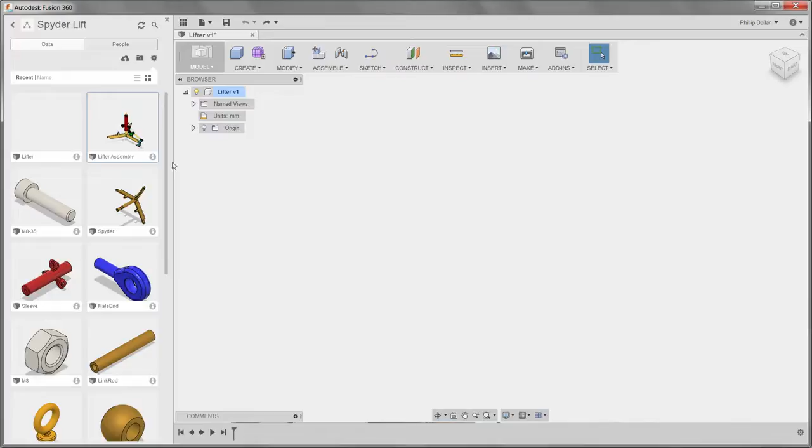In this how-to video, we're going to review as-built joints. I've started a new design, and I'm going to insert this assembly. The assembly came from Autodesk Inventor. Now, it was already assembled in Autodesk Inventor, so I want to take advantage of that. There's a couple of ways of doing that.

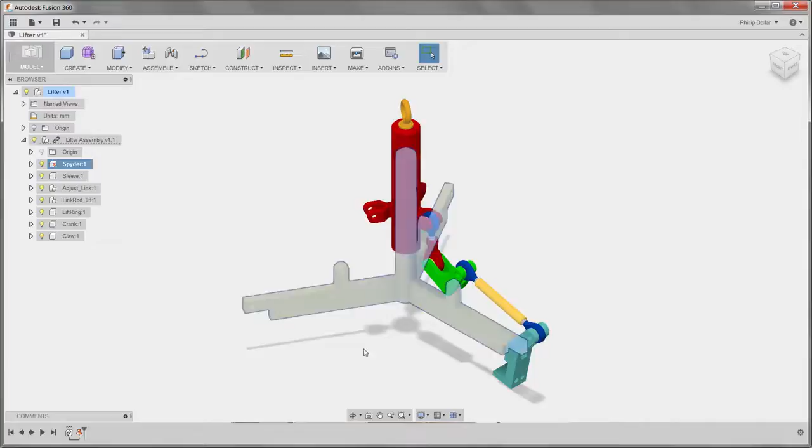The constraints applied in Autodesk Inventor don't exist anymore, you can see as I move that part. So what I want to do then is start by grounding the Spyder. So by grounding that, it can no longer move. All of the other parts, of course, can move, as you can see here. Now, as you move them, make sure that you revert back. That will pop up every now and then as you move parts or bodies in the assembly.

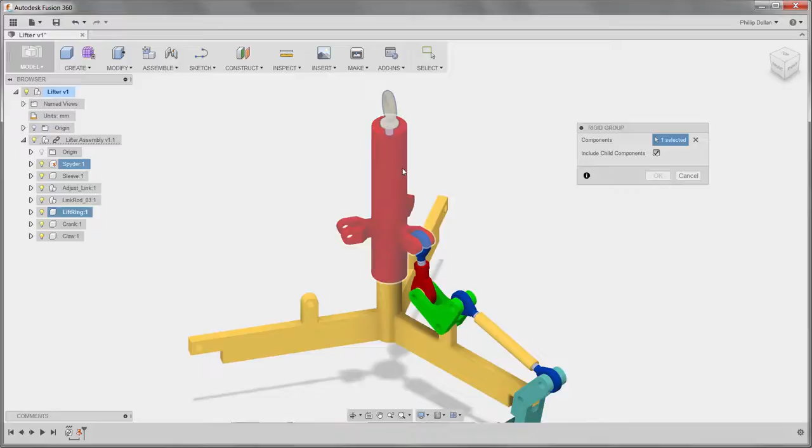A couple of things here: as-built joint and rigid group. So I want to make a rigid group out of those two parts. Click on OK. And now they're just effectively one part. Revert back to their original position. Always important to go back to the original position because I want to take advantage of that with something called an as-built joint.

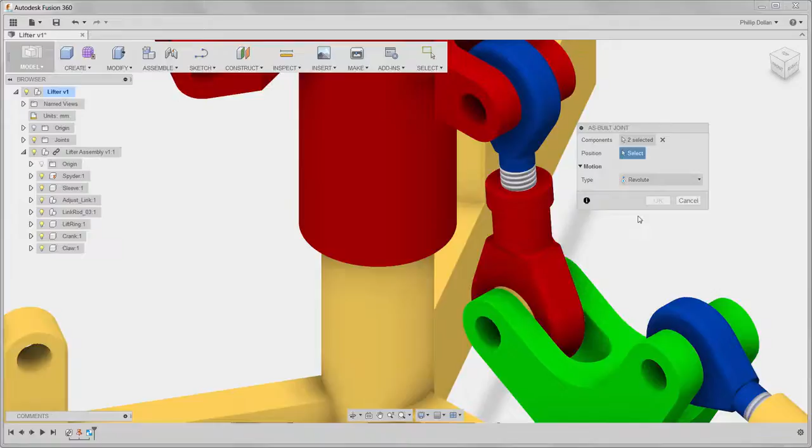Select one part, select the other, and the type is going to be a slider. That sleeve moves up and down the Spyder. I have to give it a couple of points so it knows where it's sliding, and now you can see the action's correct.

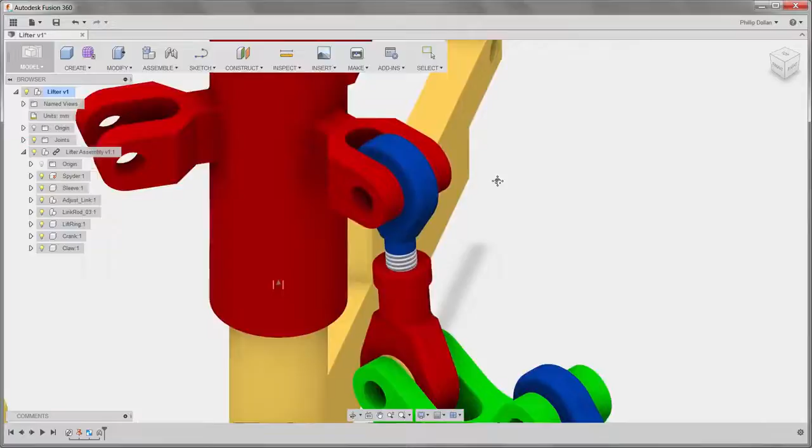I need to start applying other as-built joints. Revert back to the original position and go to as-built joint. And before I do that, I'm just going to turn off the visibility of that sleeve and of that crank part. Much easier to see what I need to do. So start with rigid group 1, 2, 3, and 4, and they will all act as a single part.

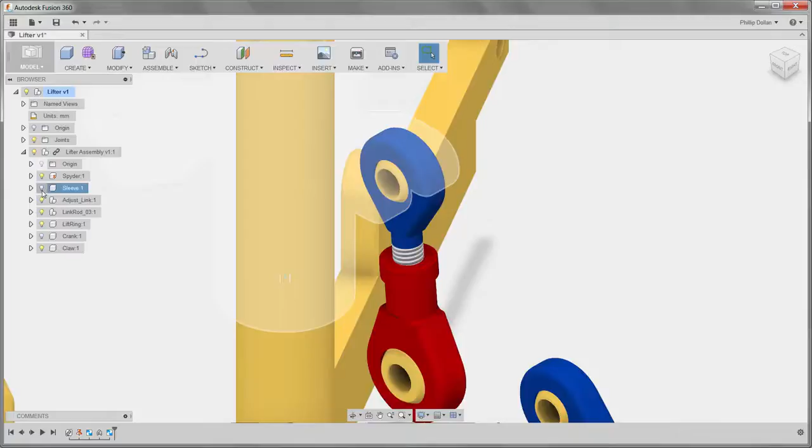Turn the visibility back on for sleeve. Go to Assemble, As-Built Joint. Select the two parts. Now in this case, I don't want a slider type. I want revolute, since this is going to be revolving.

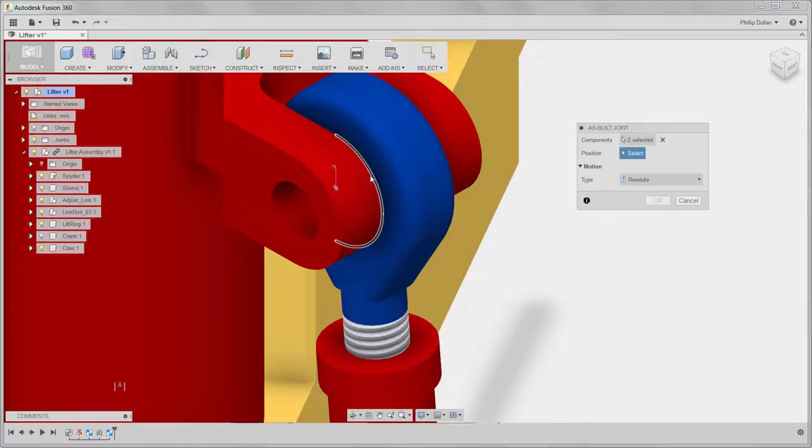Select that part, and I want that one right in the middle, and every time I go to move to it, it disappears. I'm going to hold down the Control key to effectively freeze them. Now I can select that. Click OK. Turn on the visibility then of the crank.

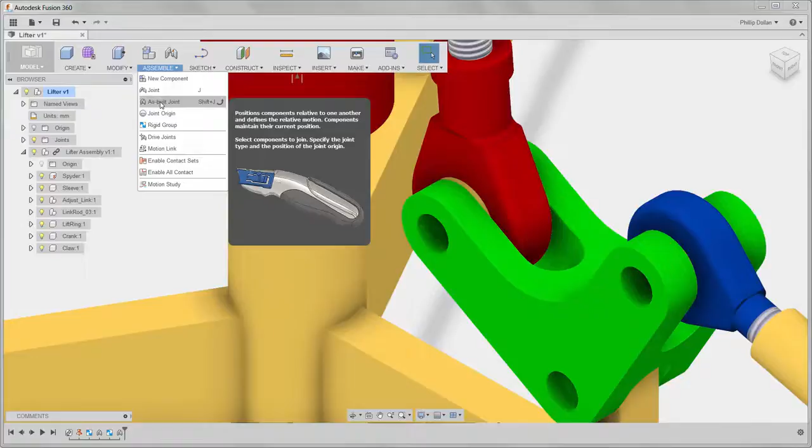And let's do one more as-built joint so you can see that workflow. So Assemble, As-Built Joint. Select the two parts. Revolute is correctly set as type. Holding down the Control key so I can select that point in the middle and then click on OK.

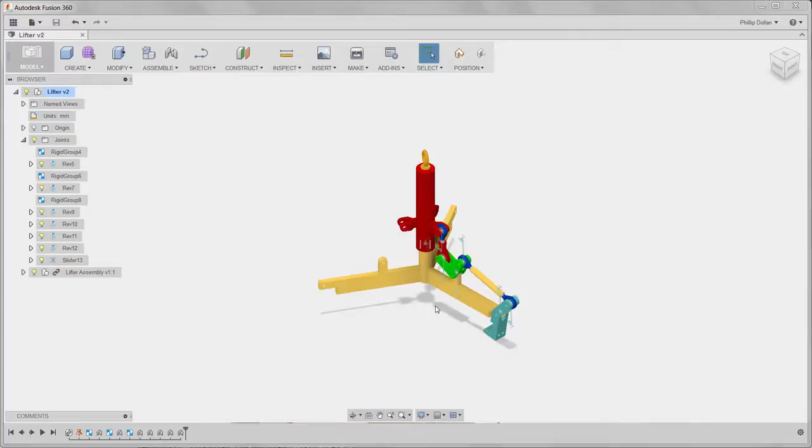I've continued on with that workflow, and I've added a number of other joints and created other rigid groups. So now this spider lift is ready to operate. I'm just slowly moving that one up or down. It can't move a lot, and you can see how that would operate. One other little tip is if you want to render, for example, it's a good idea to turn off the visibility of the joints so the little joint symbols are not visible.